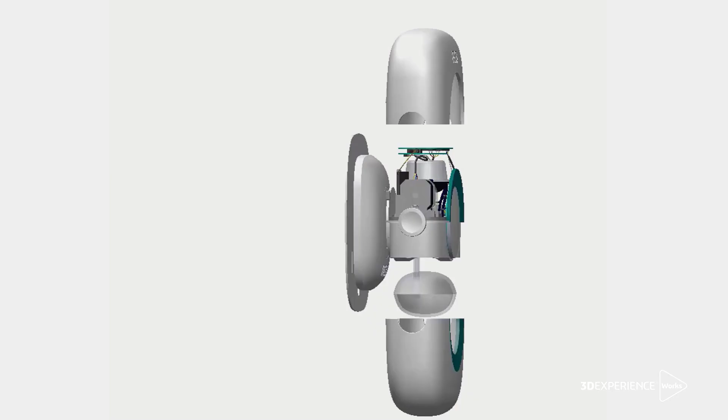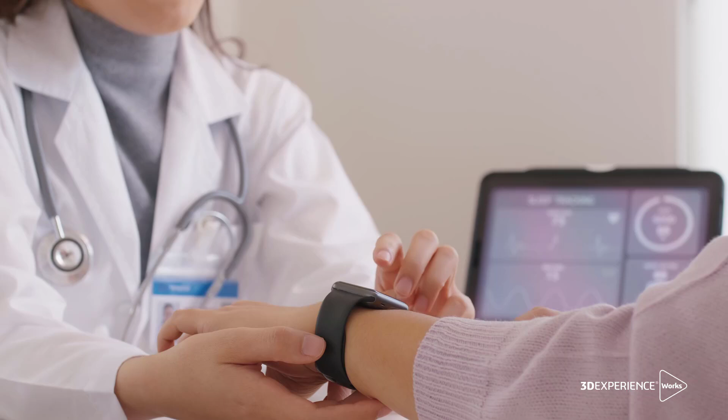Patient recovery is much better when it can take place in the comfort of their homes, as opposed to going to a clinic and getting exposed to other sick patients. The medical industry is adapting to this reality by developing medical devices that are compact, connected, and intelligent to allow patients to remain autonomous and free to move while improving their recovery chances.

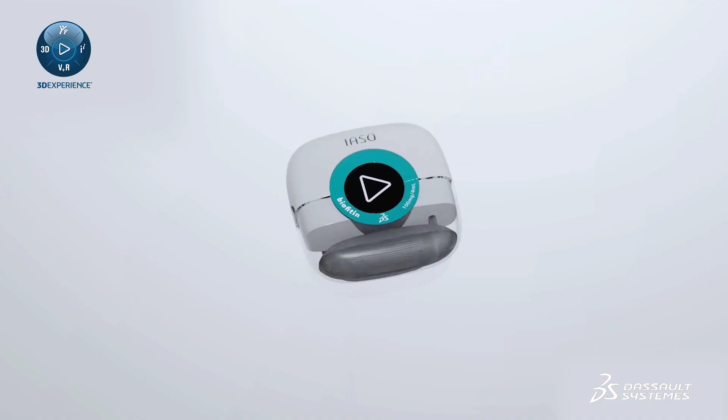Let's look at the example of IASO, which is a wearable drug injection device named after the Greek goddess of healing. Being placed on the forearm of the patient, IASO manages the quantity and rate at which a drug is delivered, as programmed by the doctor. It allows the patient to move freely and monitor in real time the quantity of drug administered autonomously.

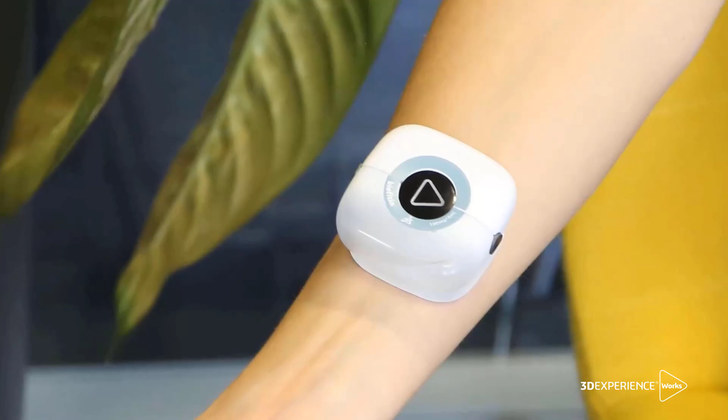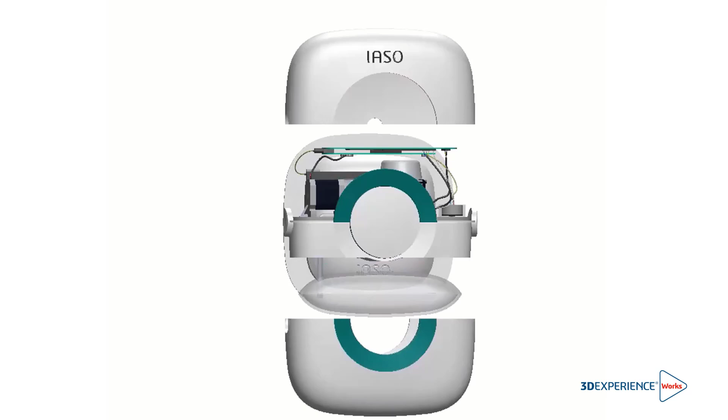IASO was designed using SolidWorks. Based on feedback from key stakeholders, some critical improvements were identified.

3DEXPERIENCE Works is aimed at SolidWorks customers transforming the product innovation process. This is achieved through cloud-based, designer-centric, end-to-end solutions on the collaborative environment of the 3DEXPERIENCE platform. This innovative environment brings all the disciplines and stakeholders together, from design and engineering, simulation, manufacturing, and governance, to marketing and sales.

The new requirements concern the structural integrity and will include an improved resistance to a drop test, an ease of opening, and a secured closing of the device.

The injection molding process is analyzed to ensure manufacturability of top and bottom plastic covers, improve flow efficiency of the peristaltic pump delivering the drug, and positioning of the antenna in compliance with regulation for human radiation exposure.

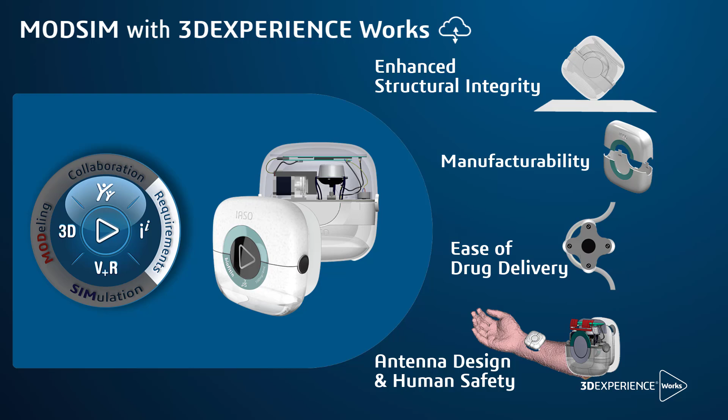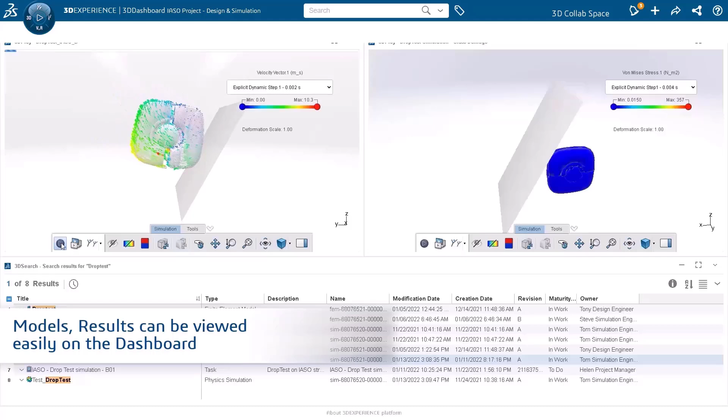A drop test over a height of 1.5 meters is simulated to ensure shock resistance and structural integrity of the device. This was done by taking advantage of the structural mechanics engineer role, which gives access to the industry-leading Abaqus solver, advanced explicit dynamics, comprehensive material models, robust contact modeling, and a comprehensive meshing suite for shells, beams, and solids.

Additionally, the drug motion inside the flexible container can also be modeled with the SPH solver.

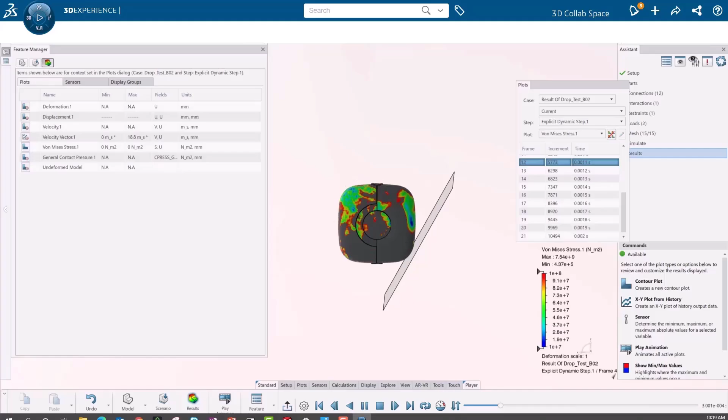Drop test simulation on the initial design showed that the covers would separate after hitting the ground. To prevent this, small clips were added to one cover and corresponding grooves were added on the opposite side in SolidWorks. The closing and opening forces were simulated to determine proper sizing of the clips.

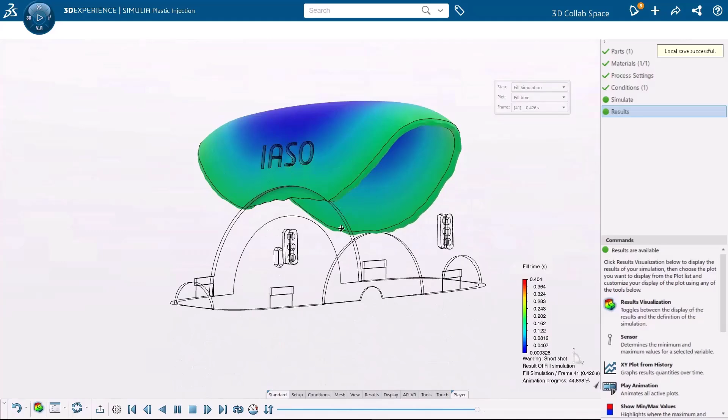The initial cover design was tested to identify potential problems with plastic injection molding. The plastic injection engineer role enables us to validate and optimize injection molded plastic part designs earlier in the development stage. Leveraging guided user interfaces, an extensive plastic material library, and automated meshing capabilities, a plastic part designer can assess manufacturability and identify defects easily.

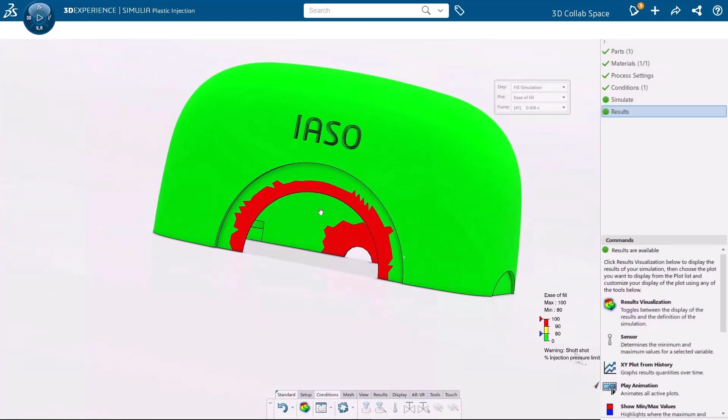The cover rim thickness was too thin, avoiding molten plastic from filling the cavity. This resulted in short shots during plastic injection. The rim thickness was increased in SolidWorks to solve this problem.

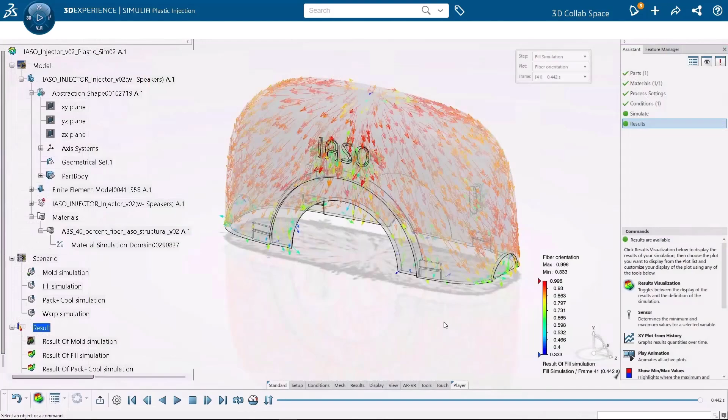The fiber orientation obtained from injection molding simulation was mapped to structural simulation to analyze snap fit performance and to update the drop test.

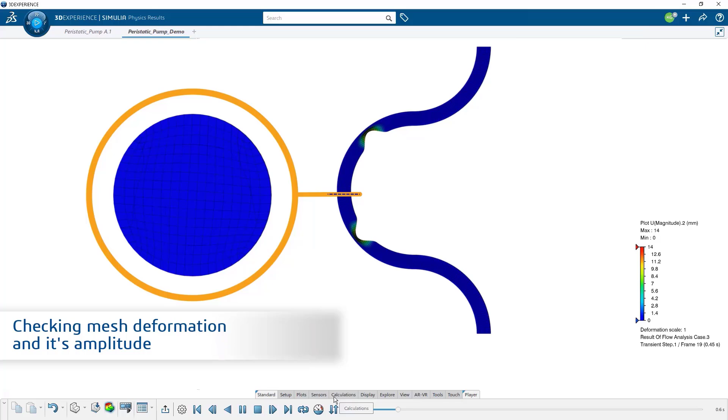The drug is delivered by a peristaltic pump inside the IASO. The fluid dynamic engineer role is leveraged here to do a design exploration of the pump unit. With step-by-step guidance for non-simulation experts and advanced capabilities such as moving mesh, complex fluid structural interaction can be easily simulated without the need of two-way coupling with a structural solver.

Parameters like the tube diameter, the tube compression, the number of rollers, and the rotational speed were explored to identify the best configuration for target flow efficiency within design constraints.

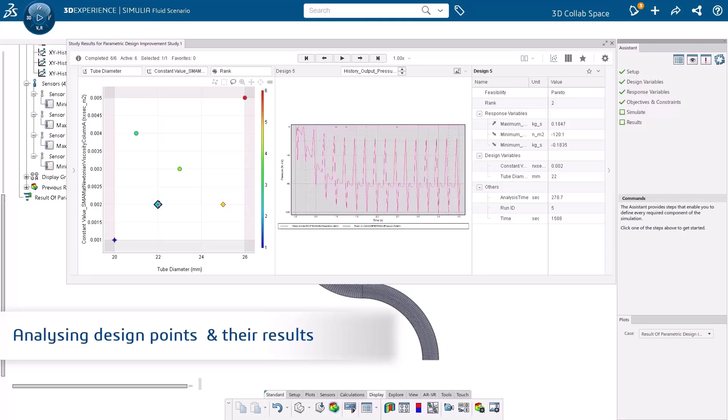The IASO is a connected device that provides information on its status, the amount of drug delivered, its charge level, and many other pieces of information. The device relies on a Bluetooth antenna to transmit this information to an app running on a smartphone.

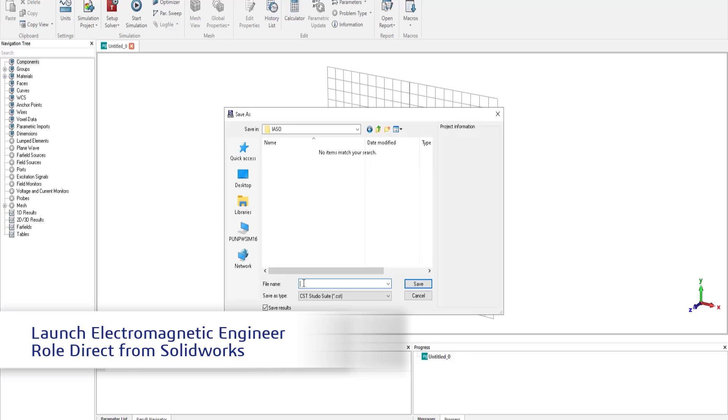Based on industry-leading CST technology, the electromagnetic engineer role provides high-performance 3D electromagnetic simulation for designing, analyzing, and optimizing electromagnetic components and systems on the 3DEXPERIENCE cloud.

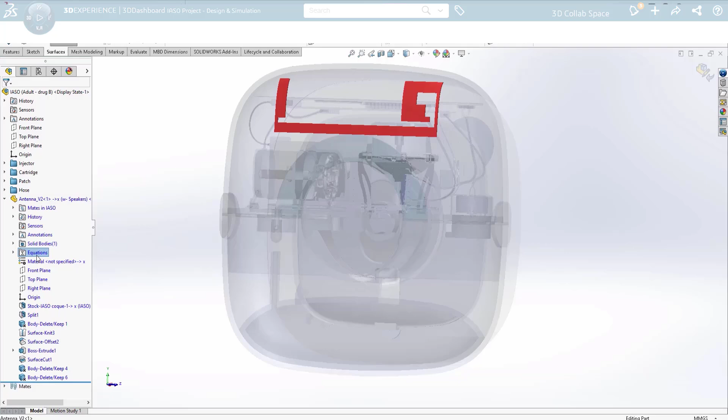Antenna selection and placement are two important processes in the development of the IASO. The antenna should have a good far field intensity coverage to make sure there are no blind spots when the device communicates with the smartphone. The targeted operation frequency and the proper intensity can be simulated easily, and the antenna parameters can be rapidly iterated upon to meet the performance requirements.

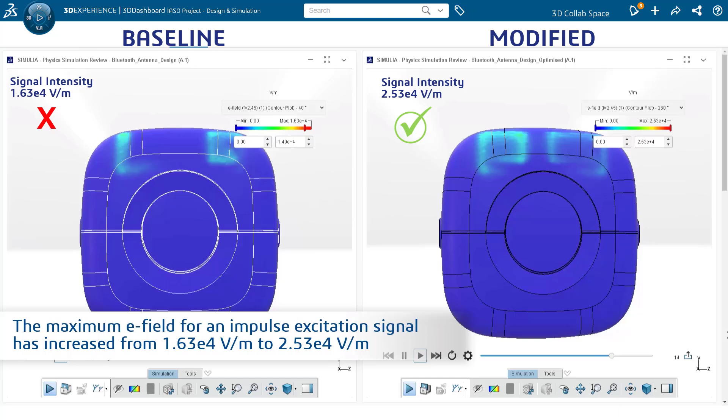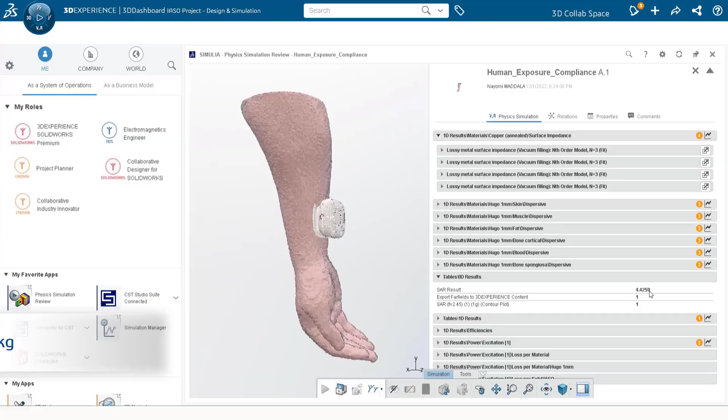We need a drug delivery device that is not only smart, but also safe. For this, we ensure that the radiation from the antenna within the device is under the limits specified by regulatory bodies like the FCC. The designers get access to a large library of physiology models and solvers to quickly assess human exposure scenarios. An absorber was added in SolidWorks to reduce human exposure to electromagnetic radiation.

The electromagnetic engineer role enables designers to explore antenna properties, signal intensity and directivity, specific absorption rates on the skin, and shielding for achieving targeted performance of the device while meeting all compliance requirements.

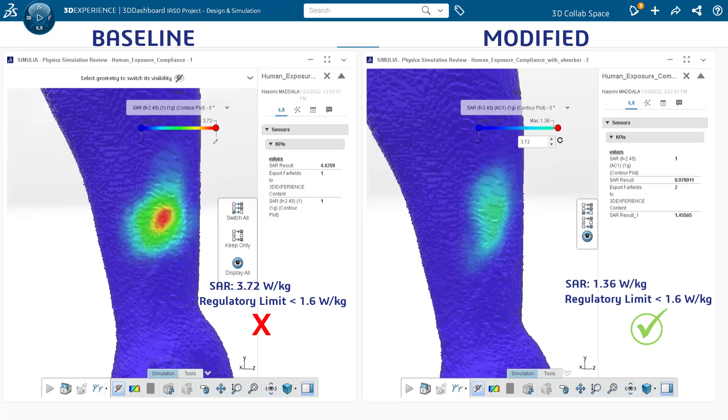Using 3DEXPERIENCE Works, the IASO was improved and all new requirements were met, which included enhanced structural integrity verified by a drop test, manufacturability of the plastic part avoiding short shots and taking into account fiber orientation of plastic material, exploration of the pump performance to achieve target rate of drug delivery, and improved antenna position within the IASO to ensure connectivity and meeting safety regulations for human exposure to electromagnetic radiations.

Connected to SolidWorks, the cloud-based 3DEXPERIENCE Works simulation portfolio offers a fully integrated environment, enabling faster time to market, innovation of a broader product portfolio, reduced prototyping and compliance costs, and removal of hardware barriers.